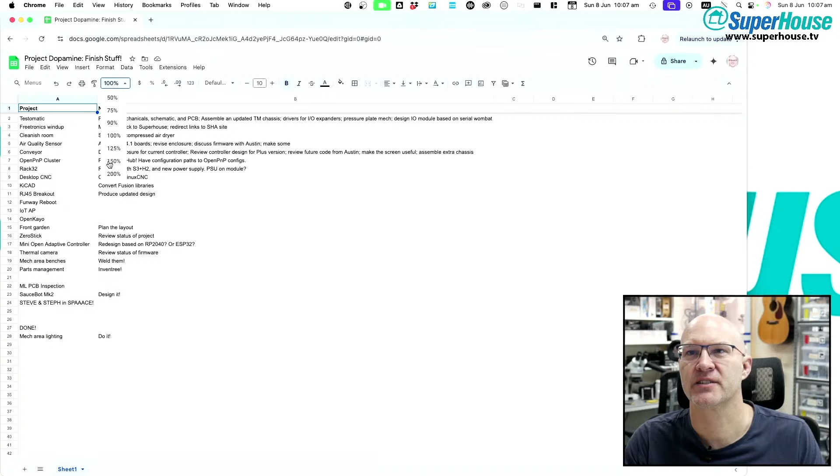Maybe even more. Let's go 200%. 200. So, yeah, Mech area lighting, done, do it, done.

ML PCB inspection, this is all future stuff. SauceBot Mark II, Steve and Steph in space. Inventory, Mech area benches, well done. I've already done, okay, I've done one. I need to do another one. Thermal camera, MOAC, Zero Stick, Front Garden, OpenKayo.

Oh, OpenKayo is, I had this code open a couple of nights ago. Add incoming and whoop,

Outgoing. Ooh, good today, Johnny. 32 months. Thank you, Johnny, my hot Swedish friend coming through again.

Incoming, outgoing messages via CAN bus. That is something that needs to be done to the firmware. Yes, I know, I'm reading this list backwards. I don't know why, it just happens this way. IoT AP, I don't know.

Do I... this feels like... Alright, this feels like a project that needs to be moved to the bottom of the list, because even though it's something that I really like, it's a fun thing to work on - oops, why didn't that drag - it's a fun thing to work on. I don't have a burning need for it right now, and the scope of it is just a little bit too much for me to make progress on other things.

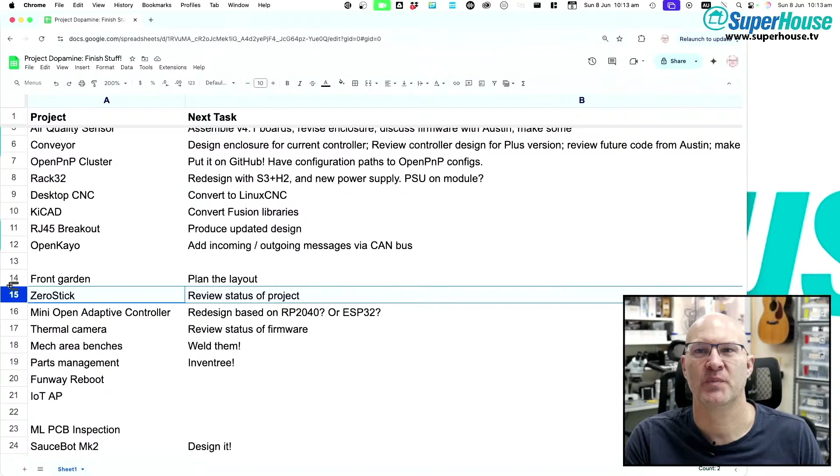The scope of it is small enough that it can be taken through to completion, and it could be a very beneficial thing for many people. So I really want to work on that. But do I move that above the line at the expense of other things?

Now, KiCad, I'm going to move that down below the line because, yeah, just because. Okay, OpenPNP cluster, I'm going to move that below the line, even though it is pretty much done, because what I need to do is be able to clear my mind to the point where I know there are things on the list below the line, but I don't need to think about them because I don't have room in my mind for them. I will just end up jumping around all over the place and not get to any of them.

So there are important things that need to be up here, and Conveyor is very high. It's actually super high right now.

Desktop CNC, okay, this is another good one. So I have my 6040 CNC machine, which is currently sitting on a trolley just outside in the loading dock area, and I want to convert that over to running Linux CNC. But I don't actually have a project that needs CNC right now, apart from a certain big project. Oh yeah, that's right, the truck curtain project. I can talk about that now. That needs CNC, but the CNC for that is being done by my friend Plasma Steve, and he is the CNC expert. He's got all the big machines, which means that if I do need something CNC'd, I have that option at his factory just down the road. So the need for doing that is actually pretty low, so I'm going to shove that down the list.

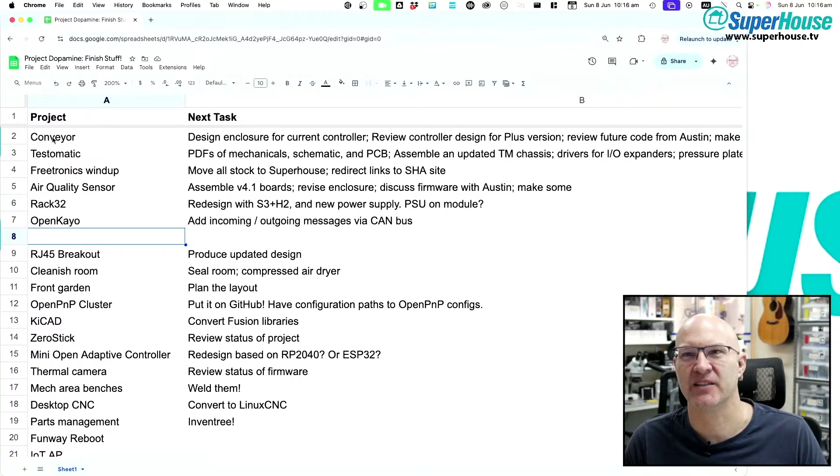So, okay, criteria, what are the criteria? I should actually have criteria. What are the criteria for things getting up into the hot zone up here where I'm going to work on them? I think the criteria, very roughly speaking, should be: there is a need for them, and the scope is small enough that I can realistically take it to completion. What else? I suppose that's the two things, isn't it? Or that they are close enough to completion that the final step, this kind of comes into the second point as well, is small enough that I can do it just to get it off the list entirely.

Now, I think the air quality sensor falls into that category, which is why it's still there. There is no burning need for the air quality sensor project.

Some Call It Fun said, do you prioritize based on what only you can do versus what could be delegated, for example, workbenches? That is a good question. So what I can do versus what can be delegated.

Yeah, welding the benches is not something that I'd thought of as being delegatable. It is, of course - I could get someone else to weld them. But I want to do it myself, because it's a fun thing, and because it is radically different to the stuff that I normally do day to day. It's more practice for me. Becoming better at welding is just something that I want to do. So I am absolutely certain that if I called Steve and said, Steve, any chance you could come over for like an hour and weld up the frame for those workbenches?

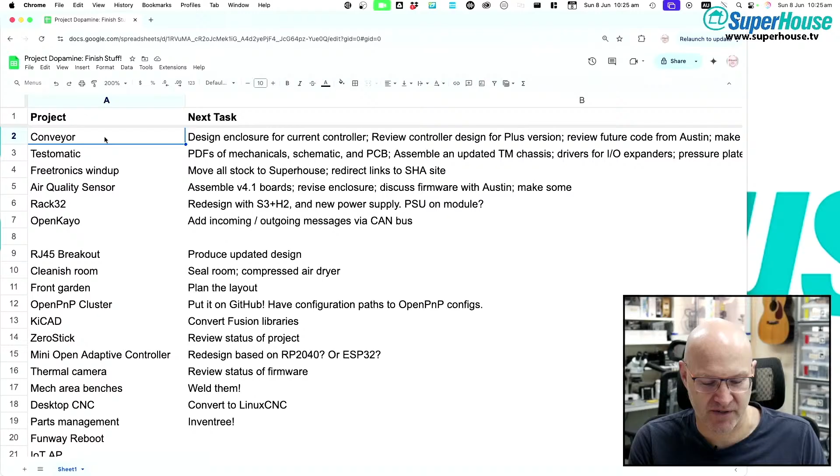And the way I saw it described on this post or whatever it was, it just put it very well. It's an experience, a feeling I've had for my whole life, this feeling that I've got to be doing something, but I'd never really articulated it or seen it explained in a very clear way before.

Alistair says some ND brains need a fast idle to keep working. Yeah.

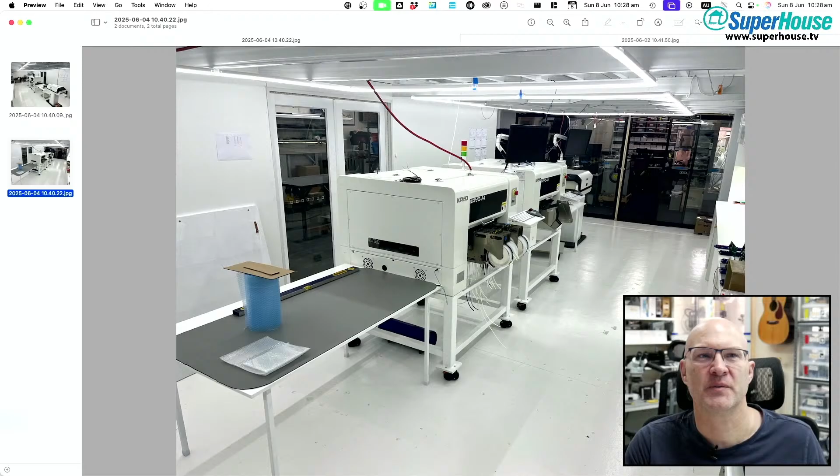And so what we've also done is move them a little bit closer to this back wall, to open up the aisle here, the main aisle. So instead of having two narrow working aisles, we've now got a very narrow service aisle down the back and a wider working aisle at the front.

Pete said, as someone else pointed out earlier, you need a new live stream thumbnail made. Yeah, I do.

So, old, new. And if we switch over to that, and that, so that's old with the back of the machines there, and that's new with the front of the machines. Don't know if you can tell. You can kind of tell.

So the size of the aisle here, this is the old arrangement, was a little narrow, and now it's a little bit wider, not a lot, it's like 200, 300 mil wider. And I think I'm actually going to move these machines a little bit more towards the wall to make this back service aisle even tighter, reduce that space a bit more.

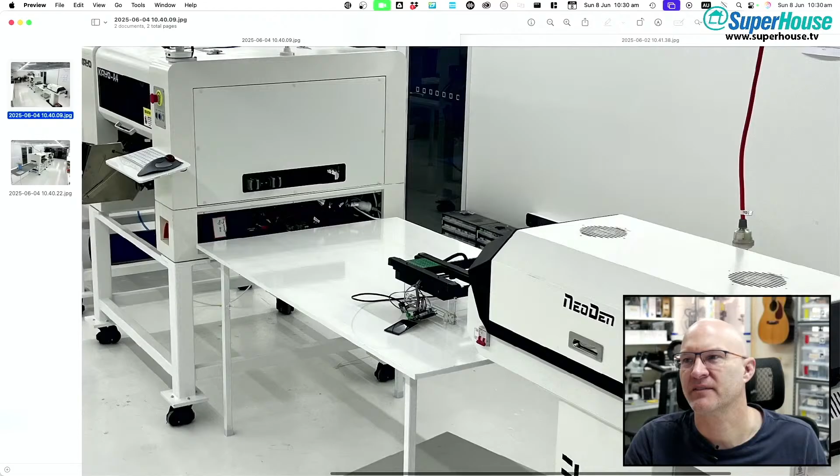So now the boards start from the far end, come through, come out here. This is the area I've been working on the conveyors, just in here, right there. In fact, you can see the conveyor prototype sitting there on a laser cut frame, and then into the oven, and then the output side of the oven, if my stupid face wasn't in the way, would be there.

Let's get rid of me. So the output side of the oven is here, and the boards come out and into this tray on the right hand side.

So when you're standing in the front office looking at the glass wall, what you're looking at now is the output side of the oven, not the input side of the first machine. How long until John walks right past the oven end to collect a finished board at the far end of the room? I've already walked around the machines a couple of times the wrong way.

So yeah, anyway, that is the update on rearranging that, and it's been a success.

It's been very good. Okay, because I did not have a chance to fuel myself, I need to take a swig of the fine beverage now.

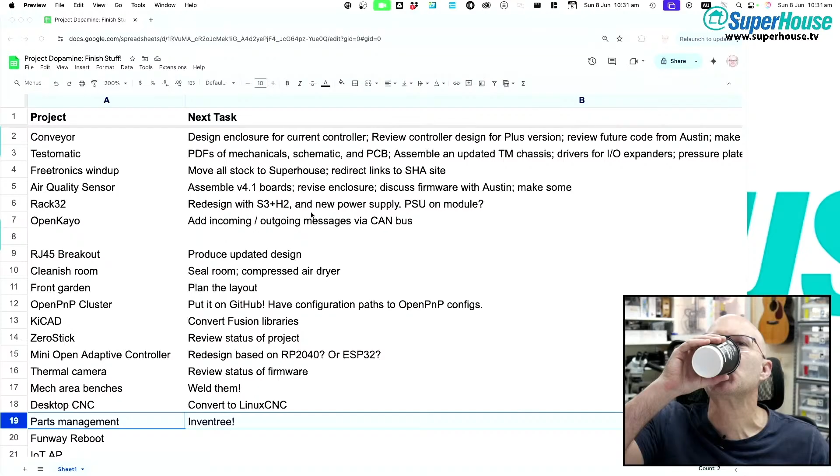Okay, that's a bit better. Yeah, okay, back to the chat.

Scott says he finished up a network job today that would have been a whole lot easier if he had his testers finished. Yeah, those testers, you are on a winner there, Scott. That is a really good project.

Sorry, I'm just seeing messages from Pete. I'm going to have to come back to these messages. Yeah, Scott, so your project... oh, I've got something else to show you as well in a moment, some 3D printed stuff related to the conveyor. I will get to actual things soon.

Stephen W said the AQS is 90% there. Yes, the air quality sensor, that's actually the reason I've left it on the list. All I need to do for this, there are multiple things. I still need to get Austin on the stream - I haven't seen him in the chat, but I apologize to Austin for not following up on this. I need to get Austin on the stream to talk about the firmware for the AQS. I need to do the enclosure revision, and then assemble some boards so people can buy them if they want to, and I'll probably sell about 3 of those. Totally not worthwhile, but oh well, it's still an interesting project.

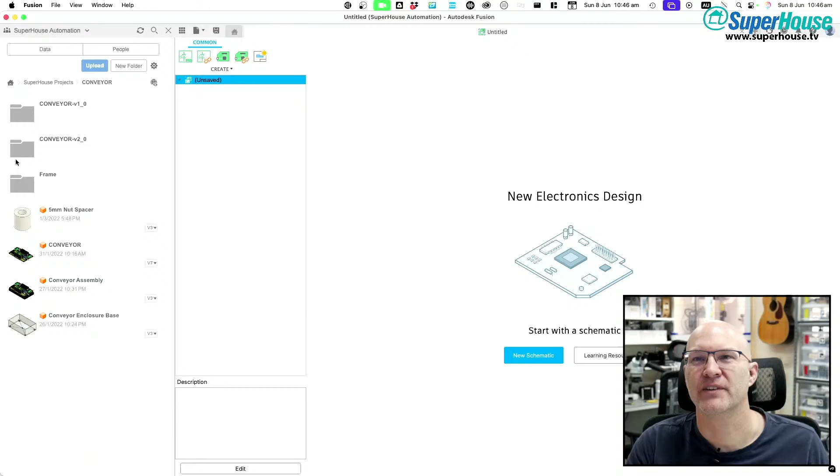Where are we, where are we? Oh, Fusion has opened. All right, so I will open Conveyor and bring this up here. Conveyor frame. All right, so this is what I was doing yesterday.

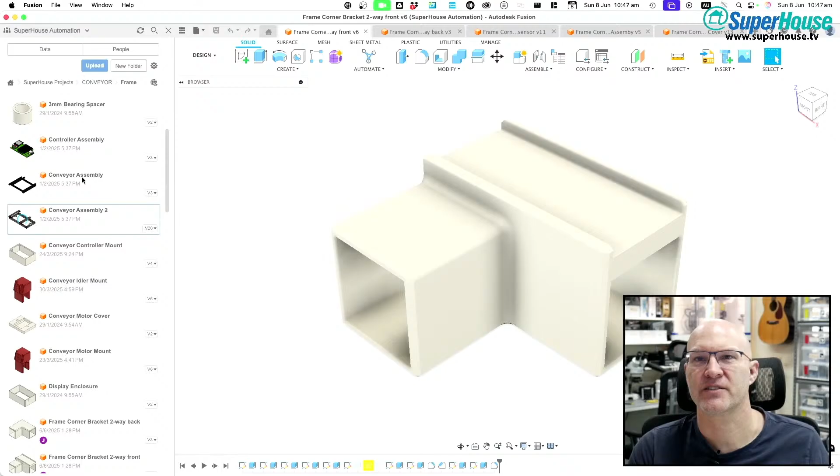I'm going to open a couple of things here, and so there's that, this front, there's this, I'll open that, and that, and get rid of this so that I can go through the different things. All right, now, do I have a mock-up of the frame assembly? Oh yeah, conveyor assembly 2. All right, this will be useful to explain what's going on, because you can see this quite clearly.

Now, looking at it from the front, this is what the conveyor looks like, and I made the different parts different colors so that you can see where 3D printing ends and aluminium begins and vice versa. Now those linear rails are not the full length, they actually run from there all the way back up to there so that the back rail can move all the way along, and that is no longer done that way. So this is quite an old assembly, I don't know when this was last edited, but it was a long time ago. But it still serves to illustrate approximately what's going on.

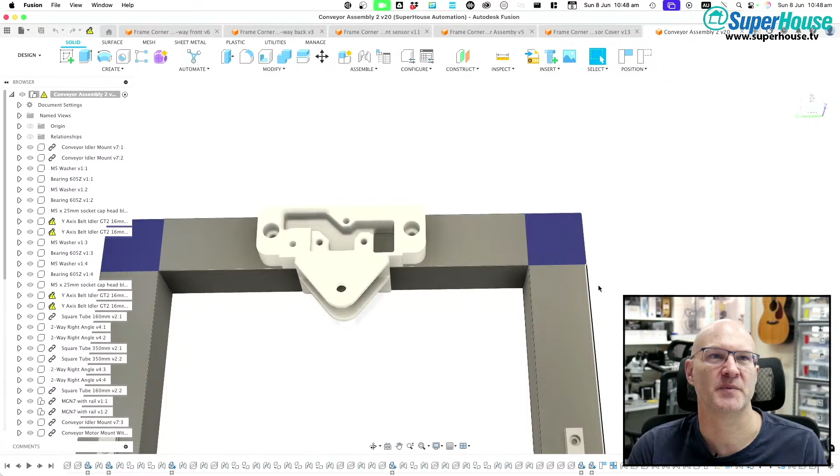I start with this fixed square chassis, and it has these corner pieces. This is made out of aluminium extrusion, it's 1 inch square extrusion. So 25.4 millimeter extrusion, or something like that, whatever a freedom unit is. And then there are plastic pieces that you hammer on, so you get corner pieces and then you hammer them together.

And that forms the bottom square frame. So that square frame at the bottom is a fixed rectangle, and then everything else attaches to it. Cables go through it, there are cables that go into the frame here, and then they pass around this corner all the way along the side, and then they come through this corner, and then they come up here into this mounting point. So this is the mount for the y-axis limit sensor for homing, and that's the clevis for mounting the idler pulley for the y-axis belt, etc. So anyway, you get the idea.

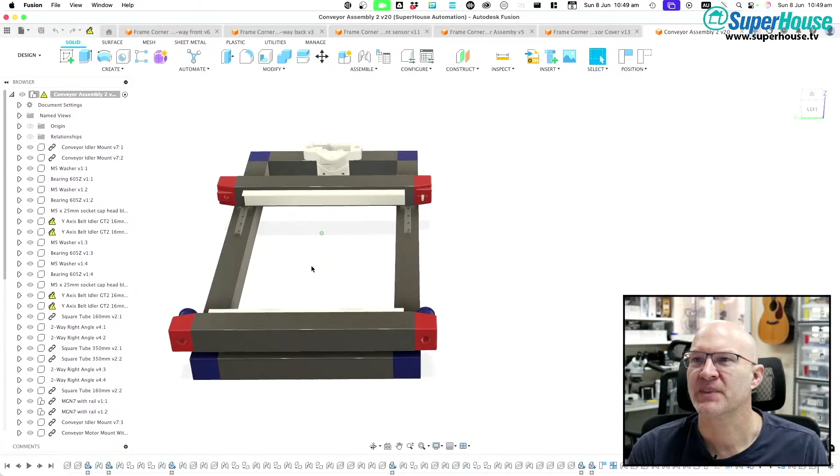This is pretty close to how the current conveyor works. If I went and grabbed the conveyor and you looked at it, you would see that this is what it is.

Now, there are a couple of minor issues. One is, yeah, the scale - some of these dimensions have changed slightly. This aluminium actually comes a little bit further out now, it doesn't finish inboard of the base frame, it now comes out just slightly past it. Or actually, I think it might end up flush with it. So the end of this bit of aluminium, this line right here, is now - I think it might be 350 millimeters, I can't remember - ends up flush with the outer face of this frame.

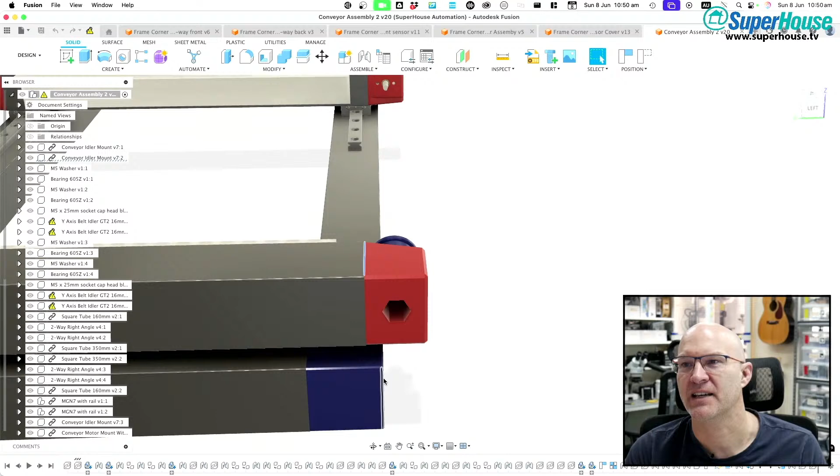That's dictated by the length of the GT2 timing belt that goes around it. So I'm in the situation now where I need to make more of these.

Oh, and also we now have the board sensors attached. There's a board sensor near the middle to detect the central position, a board sensor at the exit, and a board sensor at the entrance. They mount on little brackets that go into this cavity and protrude out so the sensor is looking straight up towards where the PCB would be.

All right, so that's the current state of play, approximately.

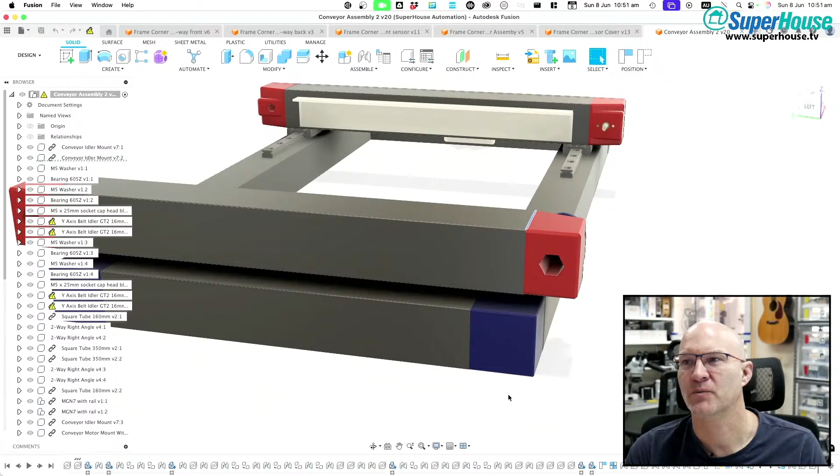I need to make more, and I wanted to try to make something that was more integrated, simpler and more repeatable for me to assemble. This current arrangement, you can't see it here, but there are spacer blocks that go in between, all sorts of small parts. There are lots of holes that have to be drilled in order to locate things properly, and the front and back rails have to be exactly parallel to each other.

So it's kind of fiddly to put it all together, and I've been thinking through how to make a design that is more self-aligning, where the pieces are more integrated. I'll show you what I've been doing over the last couple of days.

Front, back. Yeah, so this is a replacement piece for this corner piece. I wonder where that corner piece is. Two-way right angle. What happens if I activate that? Oh yeah, there we go. Now you can see it.

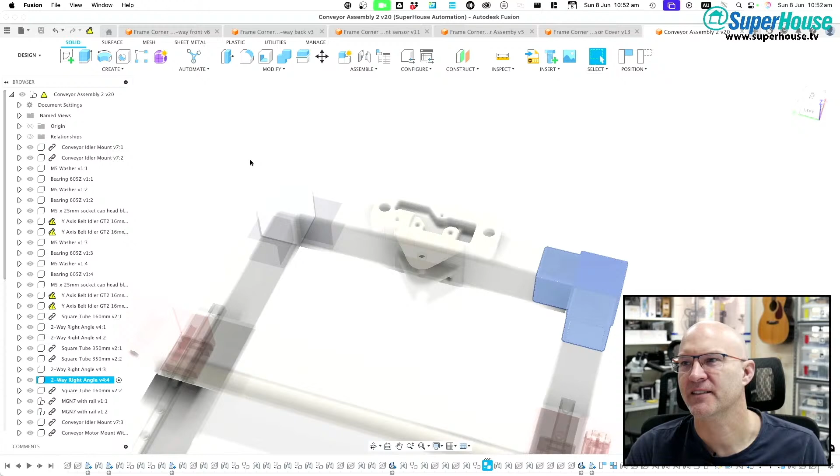So that corner piece is a cube with two bits that stick off, and those bits that stick off you hammer inside the extrusion. It actually deflects the extrusion slightly because it's a very tight fit. When you hammer this in, this top part of the extrusion ends up, like it starts flat, it's a very flat square extrusion, and then it starts to bow up a little bit in the middle because of the pressure. So this top face ends up with a very slight upward bow, and this face ends up with a very slight outward bow.

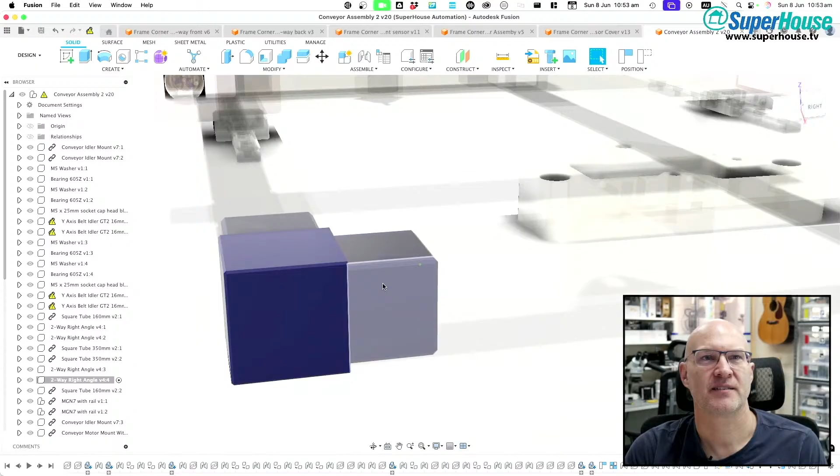So the act of hammering this together is definitely a one-way thing. You cannot get this apart again afterwards without destroying it. So it's a one-way assembly process. You buy these plastic pieces, cut the extrusion to the length you want, hammer it together, and it's there forever.

So I wanted to improve that slightly. Instead of buying these pieces, the advantage of this is that you end up with a flush face. The cube here that is the join has its face flush with the bottom face of the extrusion. And in a lot of situations, that's exactly what you want.

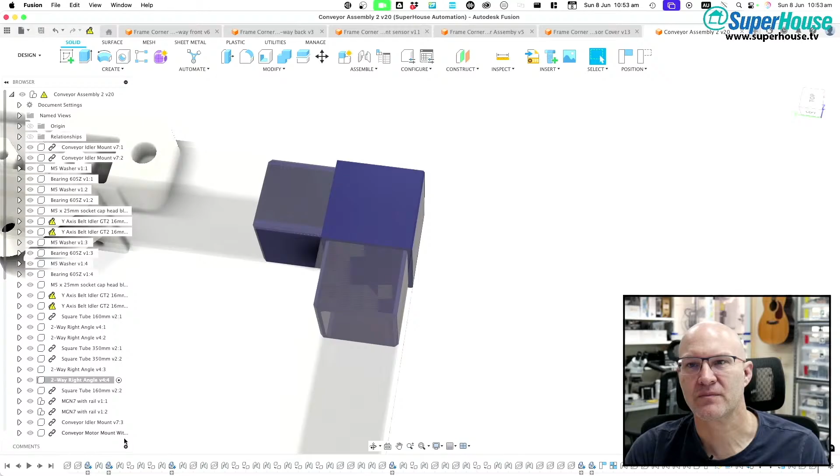If you want to make a frame, I'm going to deactivate that now. Can I deactivate from here? Pin. Release with change order. Nope, no, I don't want to deactivate. Okay, I'm just going to activate that instead.

All right, so yeah, you can see there that you get nice flush finishes, and a lot of the time that is definitely what you want.

But in my particular case, I don't really care about that. So what I've done is designed my own version of that corner coupling, but it fits on the outside of the extrusion instead of the inside. So the extrusion you cut to length and then push inside this coupling, with the result that the outside face of the extrusion is on this level. That means the corner coupling is actually a little bit thicker than the extrusion, protruding past it by a couple of millimeters. For me, that's fine, that's no problem at all.

And it means that by tuning this... Your face is flush. Ah, thanks, Pete. Not as flush as your face. So you say such nice things.

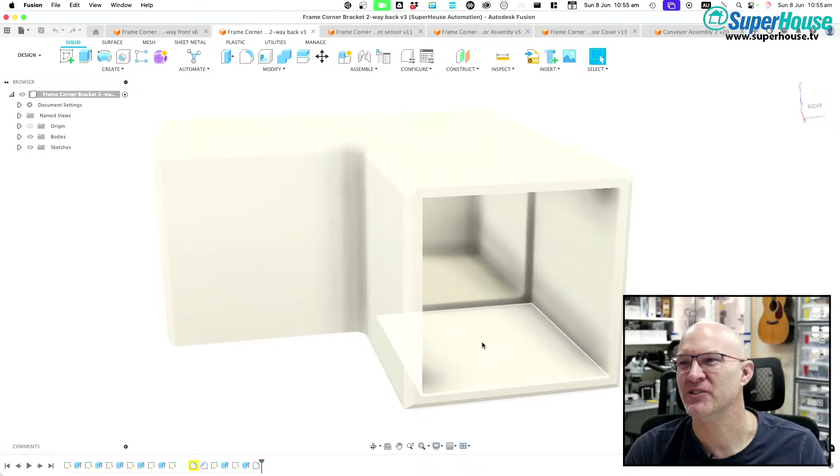By tuning the spacing on this, like the distance between these faces, it's possible to tune how tight that fit is.

Hang on, I'm going to go and grab some stuff because I printed it. I will show you what's going on. Overhead camera? Yes. You didn't quote it. I didn't quote what? Oh, he didn't quote it. No.

He didn't quote it. So these are the couplings that I've been designing. This is the simple one, it will become progressively more complicated. This is the simplest case, a right angle coupling for two pieces. So if we've got this, it's just a short offcut of the extrusion that I was using for measuring. If we have a length of this, it's a moderately tight fit, but if I get the angle right, I should be able to do it.

Nope, I need to clean that one out more. One of these I had cleaned up because it needs to be printed with supports. There we go, so it slides inside, and it took a bit of force. I have no problem that is going to hold still.

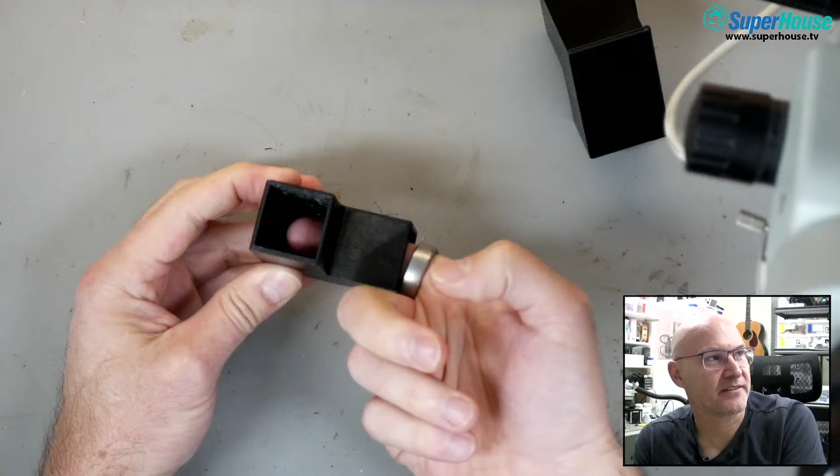Now, that is a back corner, so that could be like a back left corner or a back right corner. And I've made it so that the cable can pass through the middle. You can see in there that it's just a tube, so I can run internal cabling between the two parts of the frame.

Now, the next step is, so if that's the back right, that's the back left, I'll arrange them here. This is front right, that is front left. Now, what I did with the front ones is I integrated, because previously I had a spacer block in between the front rail and the front part of the frame. So the front rail would be elevated, and it has to be elevated because we need to allow for the thickness of the linear rail that supports the back part of the back cross piece.

So what I did was I integrated the spacer, and you can see what will happen in this case. Cable tie said, heat, cool and expand, contract cycles might see it working its way out over time. Oh, that's a good point, Pete. Yeah, maybe I should put a screw or something in it.

So I need a second piece of extrusion so I can demonstrate it. Do I have one handy? I'm going to have a quick look. I had a pile of miscellaneous bits of extrusion around here somewhere. Oh, down there on the floor. Okay, I'm going to have to go digging. Oh, here's a short piece, this will do nicely, it will serve to illustrate. Oh, and here's another piece with some fittings in it. Also very useful as a prop.

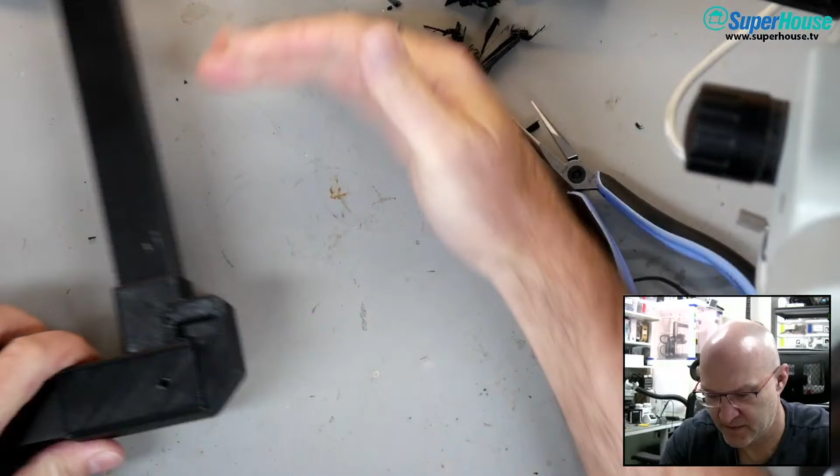Like that. And then the top rail sits in here, and the PCB sensor goes there with a little cable channel that goes down through it. So the whole corner is one integrated piece that incorporates the PCB sensor and all of the mechanicals for attaching the frame and the top rail as one unit.

Now, what does that look like? It looks... 3D printing seems to be a good source of plastic swarf. Yeah, it does.

Oh, John says you need to test it for him. Yeah.

Yeah, Grant says, oh, Shavuot, June 1st to 3rd. Yeah, I think that was it. It was whatever it was a week ago, essentially. No, I do not want to update. Every single live stream I get this update. It times it for Sunday morning.

Frame corner with front sensor. Okay, so this is that piece that we were just looking at. It's a lot easier to understand what's going on when it's grey though, rather than when it's black. So you can see that there is a mounting location here for the time of flight sensor PCB.

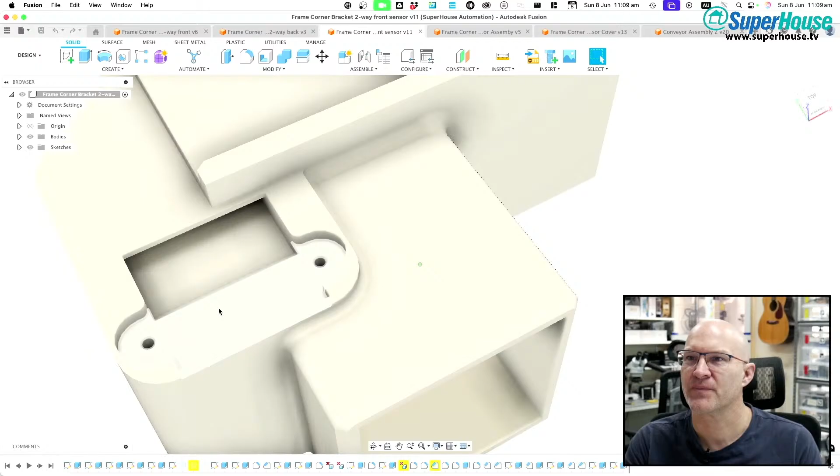Pete said, nice use of the specific machine for specific task. What settings are you using? Does it smell like cheese?

Same part, says Paul. Yes.

So let's take a trip through here. We can fly through.

Hey, what's that game from a few years ago where you were flying a spaceship? Does Pete smell like cheese? Descent, that's right. How many people here, yeah, does Pete smell like cheese? I don't know.

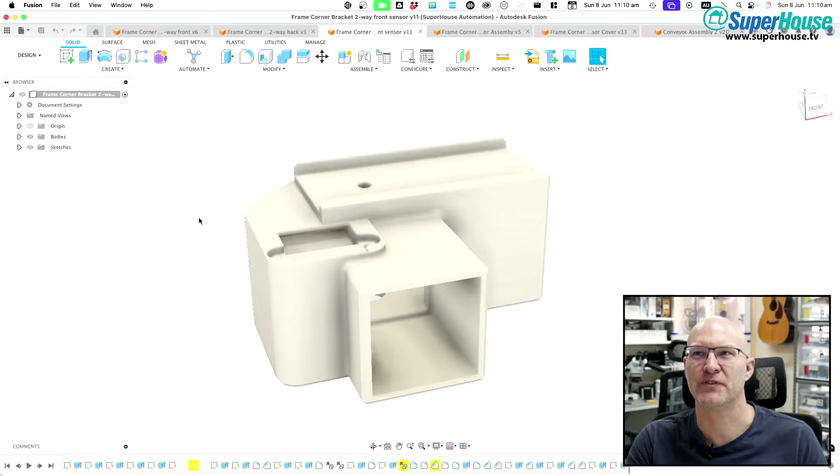How many people here remember the game Descent? I remember loving that game when it came out, no, not when it came out, it was sometime after it came out. I ended up getting it. And yeah, it was one of the few visually really impressive games that would run on Mac, because I didn't have a Windows machine, so I couldn't run most games.

But Descent ran on Mac, and it just looked incredible. It was a 3D shooter where you are flying through enclosed spaces that are essentially like a maze and being attacked and having to destroy things. David says, epic game, 6DOF movements. Scott says, Descent was very dangerous if you were prone to vertigo. Yep.

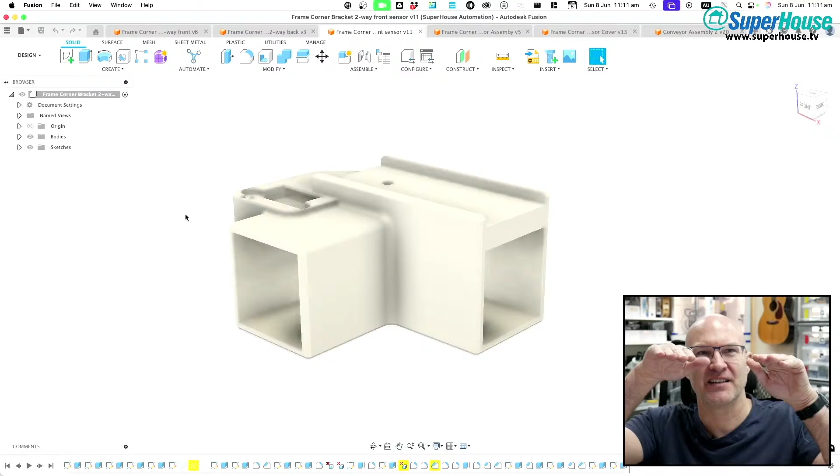It's years since I've even thought about Descent. Now I want to play it. So you're flying a ship through spaces that could twist and rotate, so you had no sense of up and down. You would end up going up into a passage and be flying vertically. But now is it vertical? Are you flying horizontal? Does it matter? If you barrel roll, so you're totally upside down, it just gave you a different perspective on things. So coming through this just reminds me of Descent.

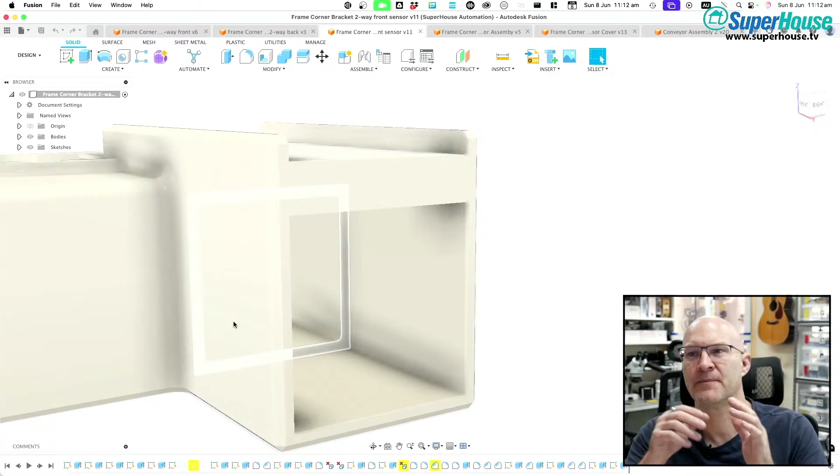So this is the shape. We have 2 bits of extrusion, three, one that goes into here and one that goes into here. And you can see I've put backstops in it, so the extrusion slides in and hits the backstop and only goes to that point. So if the extrusions are cut to the correct length and then you put them into the couplings and bed everything down, it'll end up with the correct dimensions.

So we have 2 bits of extrusion that go in. Then the 3rd bit of extrusion, which is the front rail, sits on top.

And you can see there's a small hole there through the body, and there is a big hole in the bottom that is aligned with it. The reason for that is to bolt the top rail on with a blind screw or a blind bolt.

So the idea is there will be the extrusion sitting on top of this with a hole in the bottom of the extrusion, and the end of the extrusion will be just around here somewhere. So it's only like a small distance in from the end.

So what I can then do is get something like, and this is a 3.4mm hole here, and this is, I think, a 10mm hole here. So what I can do is use something like an 8mm M3 bolt and pass it up through here.

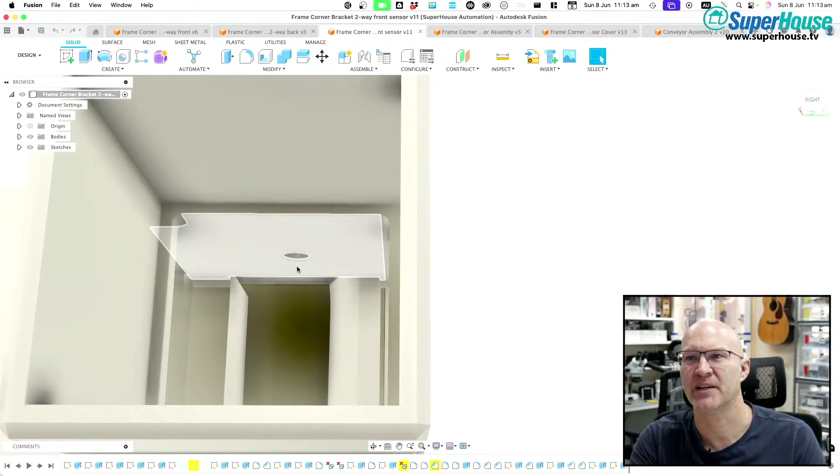So the head will pass through this hole, and the head will end up under here with a hex driver going up through the hole. And then on the top side, you reach into the extrusion with the nut, and the nut goes on the inside of the extrusion. So the end result of all of that is that it will be totally concealed fastening.

Hang on, I've got a cough.

So totally concealed fastening, a bolt going up from the bottom from inside this printed part to a nut that is inside the extrusion. So when you're looking at the top rail, there will be no holes, no breaks or anything like that. It'll just be smooth, so it should look quite nice. So that will fix the top rail in place.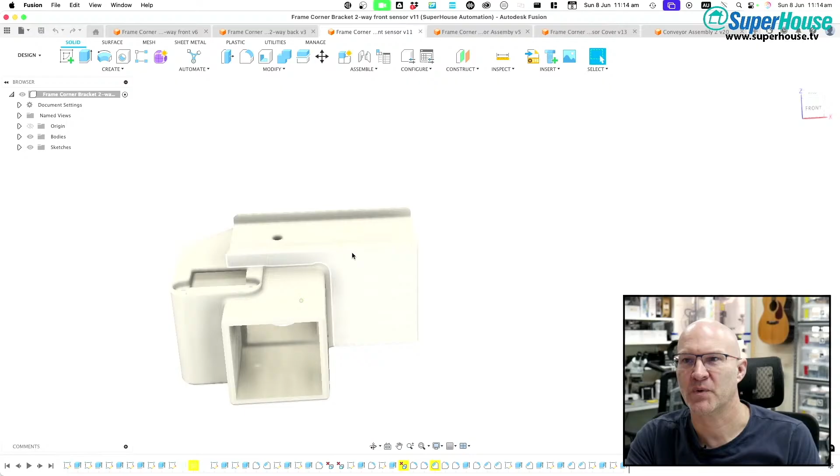Then the time of flight sensor PCB sits into this weird cavity, and I'll show you that in a second. And then the IDC cable that goes off from one edge of it goes down through this slot. Let's do our descent trip here. It goes in through this slot,

And then we're now inside. Oop, we've lost all perspective. It comes in, whoop, through. This is the other side of that slot.

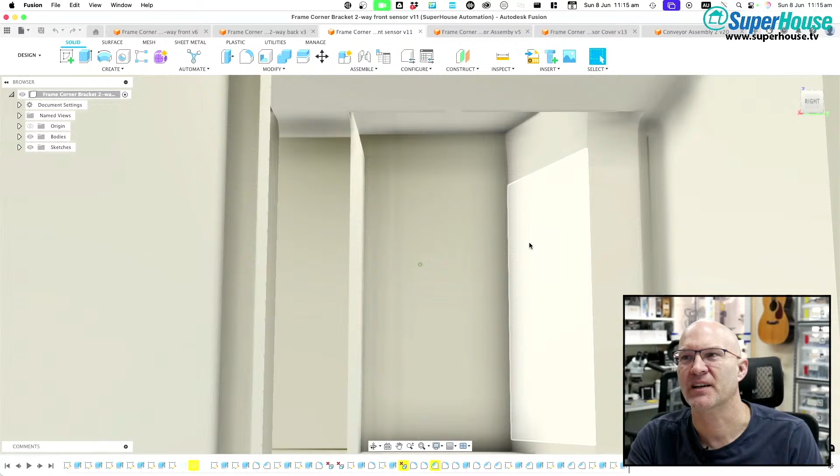Comes in there and then folds down, and I put an angle on this wall, partly so that when you push the IDC cable in, it'll hit this face and then be deflected sideways so that it will come out through here.

And then the IDC cable runs through the inside of that extrusion, which is the front part of the frame, and then out of a hole of that extrusion into the controller. And the controller uses that to connect to the time of flight sensor.

So the assembly here, oh, and the other thing, so this piece then sits on top of the time of flight sensor, and that is going to make sense in a minute. So this is an assembly, and you can see that there is this top piece.

I'm going to turn off the cover. So you can see the time of flight sensor PCB just sits in that location. Cable soldered to it goes down through that hole, and then this cover goes on top, and then it's got two countersunk screws that go down into it, and the extrusion sits over the top of that tab.

So hopefully that will end up being a very neat structure on the corner with everything integrated, mechanical and sensor, and everything all inside this one thing.

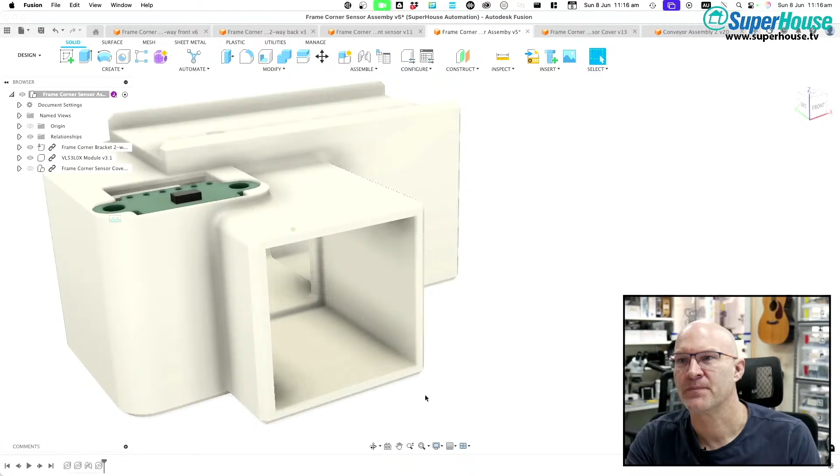So, sorry, I'm pausing because I'm just hearing a car very slowly going past out the front.

Yeah, that's the current plan. I haven't printed any of the top cover yet. So that is the top cover. And you can see that it has a little recess.

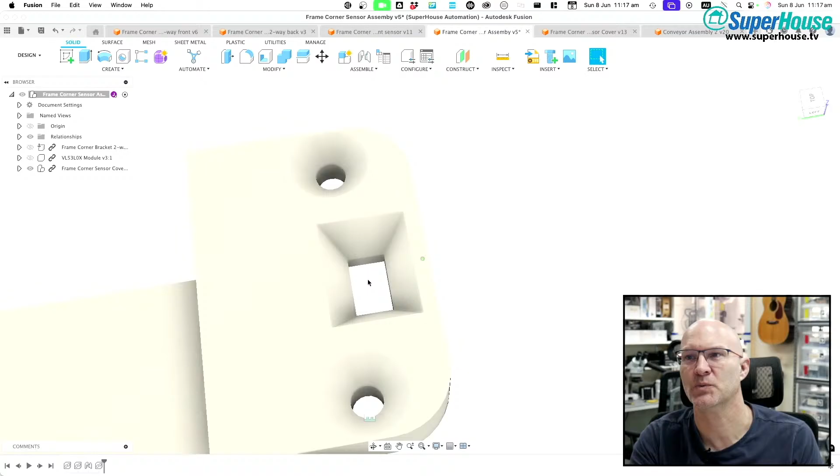Call It Fun said, does time of flight sensor work through plexiglass? Could cover just be solid to prevent debris from falling in? That's an interesting idea. Yeah, it probably does. I don't know what wavelength the laser works at, but I'm pretty sure it would.

I'm not sure if the time of flight sensor would be attenuated by plexiglass or something. So yeah, that could be a clear cover potentially. Well, something to experiment with.

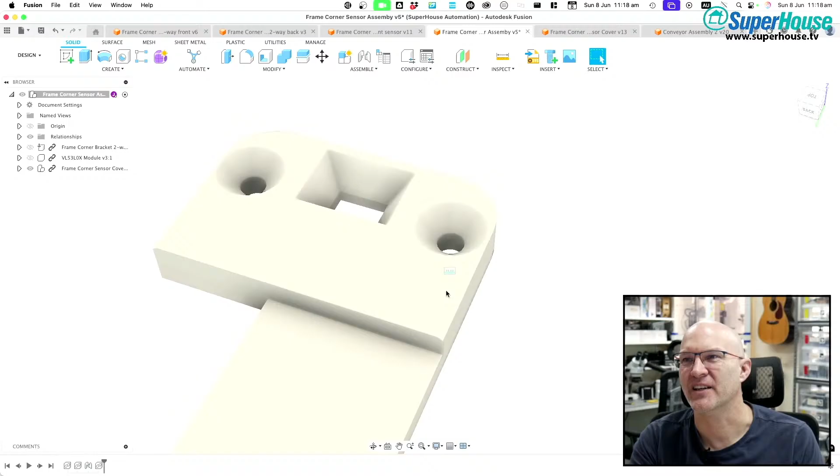I also thought about doing these screws from the bottom. Oh, Tinker is sending me some pictures, which might be for showing on the stream. Yeah, so at the moment, 2 countersunk screws to hold that in.

So if I turn these back on, this does kind of annoy me that there will be 2 screw heads visible here. But I keep telling myself that that's just me being OCD.

Because what I could do is make the top of this flush, have holes in this, and then have a hole from the bottom that passes all the way up. Have a large hole that goes up, say 2/3 of the distance, and then get smaller, so that a short screw could be put up through that hole, with a Phillips head screwdriver or a hex head, and then the end of that thread would go into the cover. So I would need little holes in the cover that don't quite come through to the top, and then it could be screwed in from the bottom and held down.

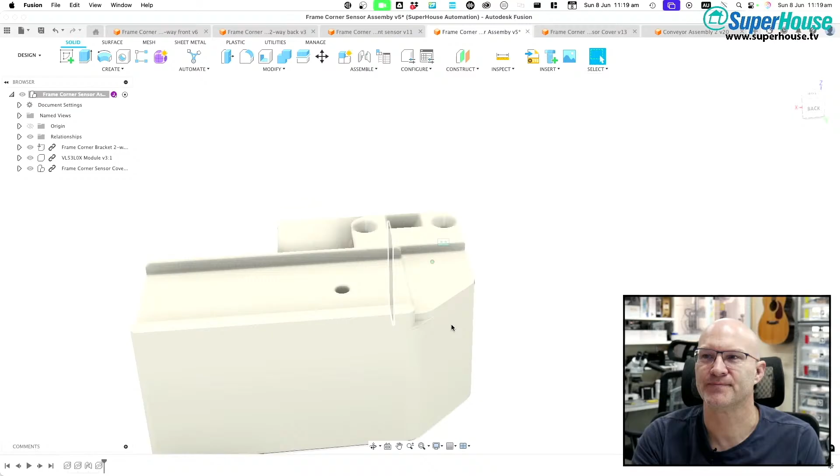But that all just complicated things, so I figured this is functional, it works. I'll use black countersunk screws, which I have plenty of, and this is going to be black plastic anyway, so it's kind of going to disappear. I need to stop being so obsessed with the aesthetics of it. Anyway, that was my little exercise yesterday afternoon, doing this front corner piece of the frame.

And that one that I just showed, ooh, Wagon Load says, lid slides on with a dovetail joint. Ooh.

Jordan says, integrate clips. And Paul said, do you want to notch the edge of the cover to match the rail?

I thought about making this more complicated, because what I could do is bring up, if I get rid of that and that again, what I could do is bring this in a little further and put a ridge along there.

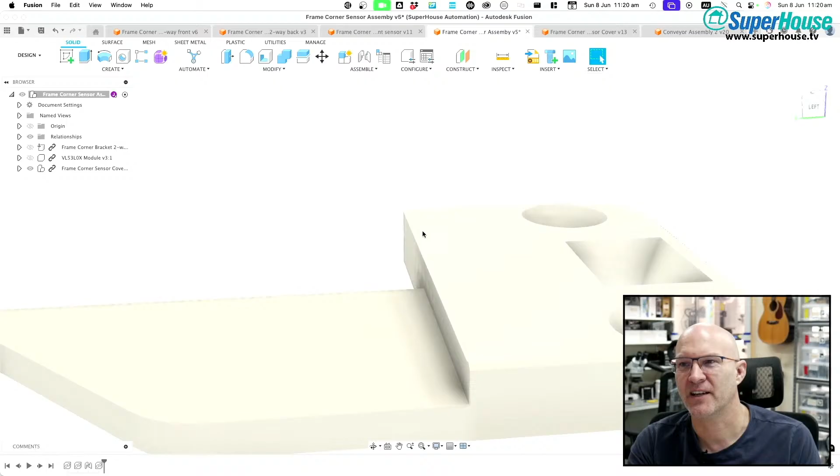Pete said, what's the long-term goal for this? Are you aiming to build a sentient garden gnome? Yes, I am planning to build a sentient garden gnome.

Yeah, so this part, and remove that little notch there, and properties - no, that's properties of the material. Yeah, get rid of that. Make that a vertical end so that when this slides into place, it aligns with that profile.

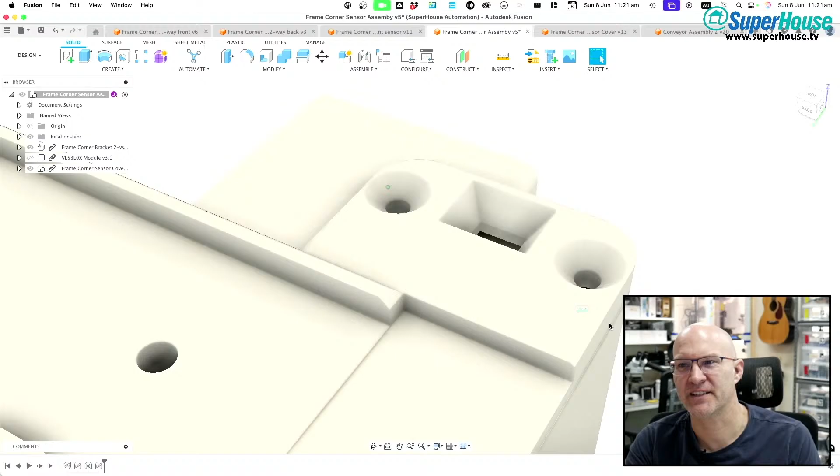So include some of that profile on this cover. I could do that. Now, the other thing, of course, is that this could just continue all the way across, and then this cover could end right there. That would be the other way of doing it. Make that cover much simpler, so it wouldn't have this tab sticking out at all. It would just be a rectangle with two rounded corners, and this part would actually be fixed.

It would be part of the main body. So I think that it would probably... Scott Miller said, just extend the profile. Yeah, that's right. So extend this profile. Imagine that was not there. This face here, extend it straight this way.

Now where is that? Oh, I know why I can't edit that - it's because we're in the assembly right now. So if we're in here, what was that? Edit feature. That was a 1mm chamfer.

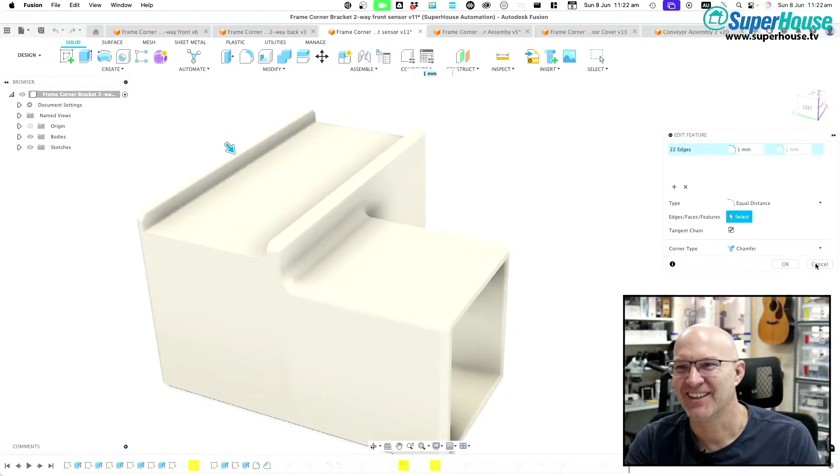Let's have a go at this right now, I feel like doing something constructive. All right, 1mm chamfer - where is it in the timeline? Is that the chamfer? Edit feature. No. 1mm. Yes, 22 edges.

All right, so that is those edges. Why are there 22? Why are there 22 edges?

Okay, if I suppress that feature - suppress that, no, that's the wrong one. I want to unsuppress it. Why isn't it showing it in the timeline?

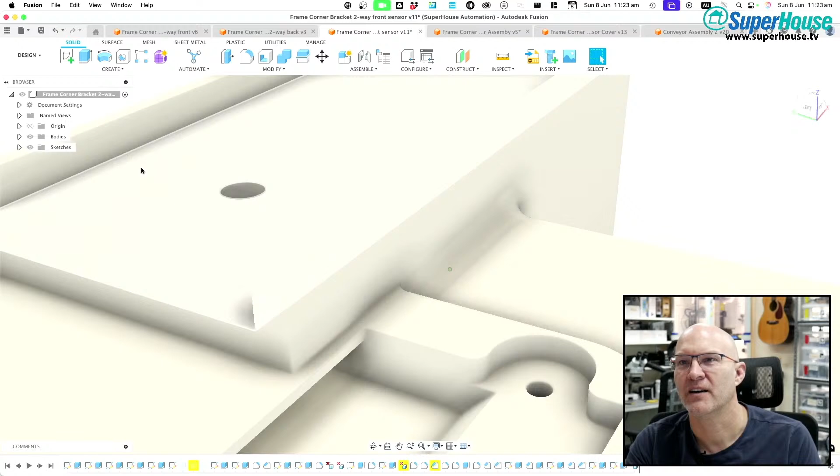I want to find that. Oh, there it is. Okay. Oh, it's all those edges. Do I want to... okay, let's see if I can just delete that without... I can. Nice. Okay.

Oh, that is a... yeah, because that's rounded around. Let's get rid of that and that. And maybe, can I get rid of that? Yes, that works. Okay, cool.

I can do this. What we can do is go extrude and distance to object, and bring it to here. And 3D CAD is a reliable source of brain damage. It is a reliable source of brain damage.

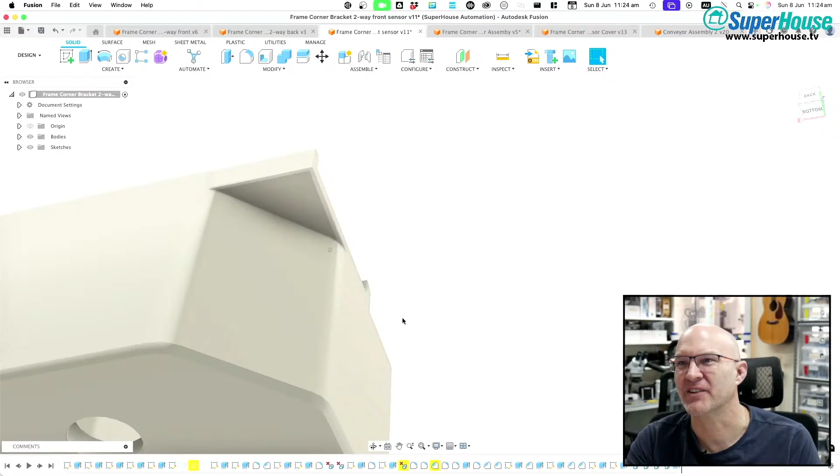And then do OK. Then I want to get rid of that overhang. Not that it matters - I mean, that overhang could actually stay, except that it's going to be annoying from a printing point of view.

So what I could do now is extrude all in that direction, cut, okay. So now we have a nice end. Yeah, that's kind of cool.

Oh, before I save this, I just realized, no - I just realized why I did it the other way. Hang on, I'm gonna cough again.

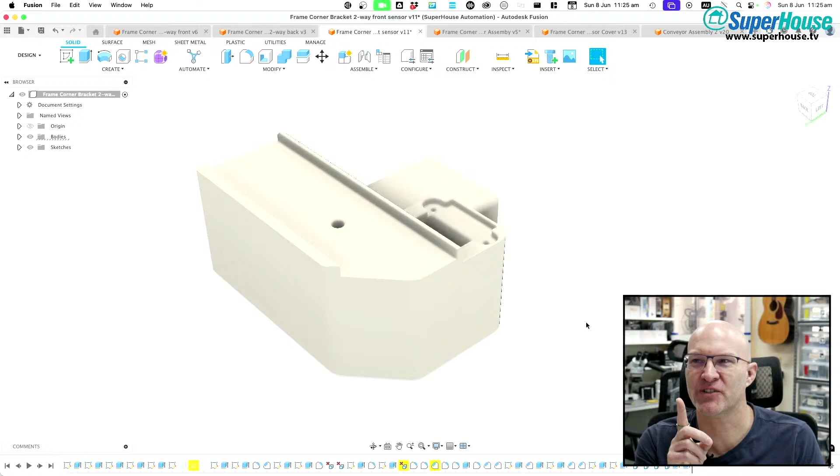Okay. I wish I could do it like this, but I can't. And the reason I can't is I need to be able to slide.

Now, where's the assembly? Yes, you remember this piece right here? That needs to fit on. Now, can I make that work? Maybe I still could. Where is it? This one. Yeah, that one needs to slide on. And I think I need to remove that part of the extrusion back to about here. How far does it come off?

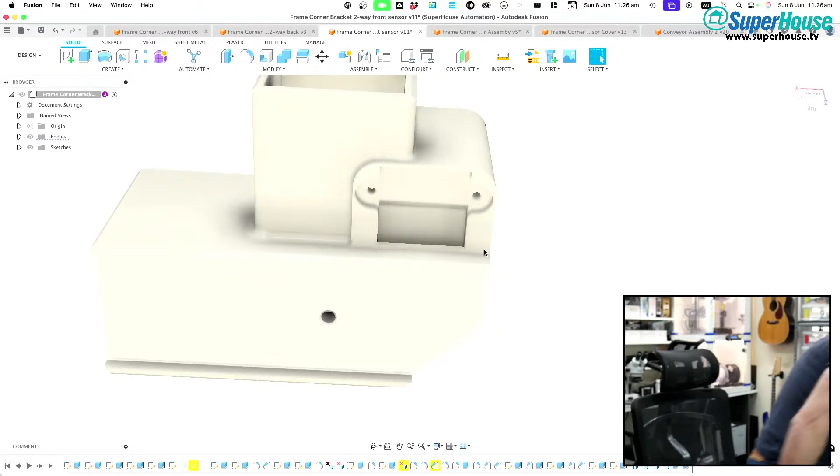All right, I'm going to go and grab the other bit of conveyor, the other prototype, because I don't have the full thing as an assembly, and I need to see what's going on.

Well, maybe it would work. No, it is going to work. It is going to work as is. I will show you why.

And the thing is that I could actually change the dimensions slightly on the horizontal rails. I'm going to have to move a whole bunch of things around here. This might be slightly out of focus.

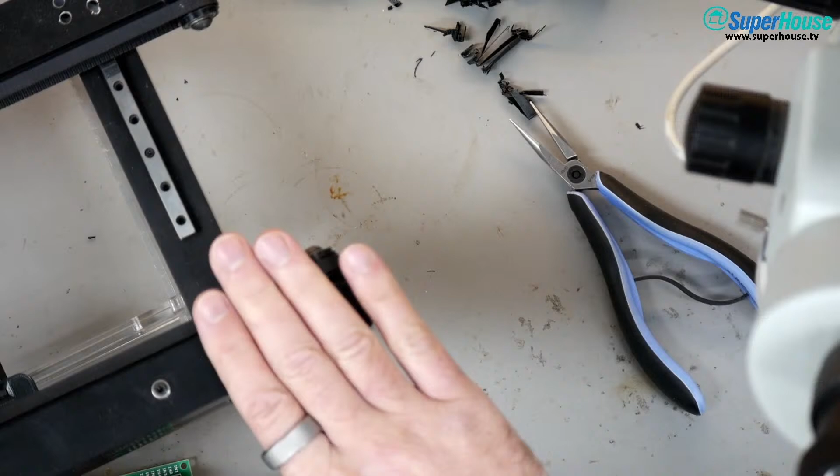So this is the corner we're talking about. This is the front right corner. And what you can see here is the PCB sensor. If I angle that a bit, you'll get a better view. So that's the time of flight sensor.

Save as with a slightly increased rev number. Yeah, I see what you mean.

Okay, so this distance here, if I grab myself one of my handy dandy little measuring devices, from this face of the extrusion, the sensor is extending 18 millimeters past it, and that is flush with the end of this extrusion. So this extrusion comes 18 millimeters right there past that face, and then this has to clip into it. So this piece here goes into the end, and that needs to clear whatever else is going on under there, which is where our new little thingamajig is going.

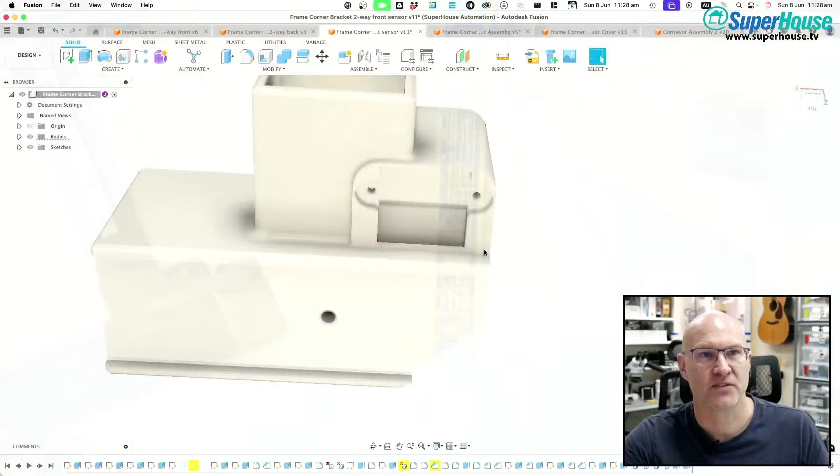But that actually works because the 18 millimeters, this face here, is the location of the face on the new piece of the structure. So if we come back to this view, the extrusion comes past here.

I wonder if I should square this off. No, I think I'll keep the angle because it looks cool. So this face here will end up approximately flush.

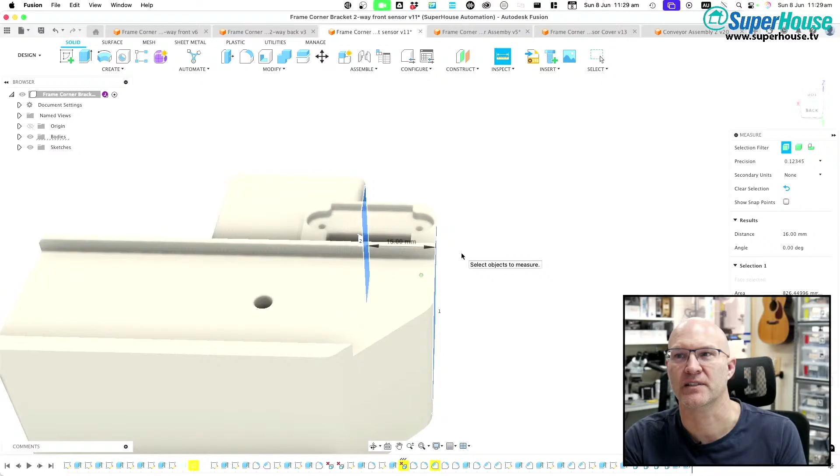In fact, I wonder if we can get a distance on that, even though they're offset. Can I do a distance from there to there? Yeah, 16 millimeters. And we've got 18 going to the end of the extrusion. So the extrusion is going to hang off the end of this by 2 millimeters, and then the cap will go into it. So that's perfect. That works really well.

Very, very cool. In fact, I wonder if... Scott Miller said, so it matches the end of the extrusion either way. Yeah, yeah. So that is fine.

That can stay like that. We can run this the whole way along. And then the cover that goes onto the time of flight sensor can be simpler.

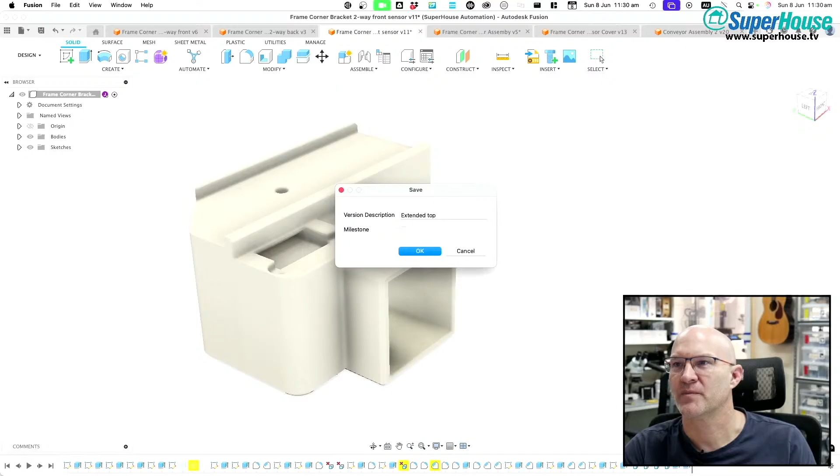All right, I am going to save this now. And I'm actually going to put a description in this version. I'm going to say extended top rail support, so that if I need to find it in my history in future, I can.

So now, if I go into not that one, where's the assembly? This one. And I update this assembly, this should now change. Yep. And then if I turn back on the time of flight sensor, it's sitting there.

And the problem now is going to be this, because it's got this tab that extends and I need to get rid of that tab. So back, front, sensor cover, this, I need to get rid of that tab.

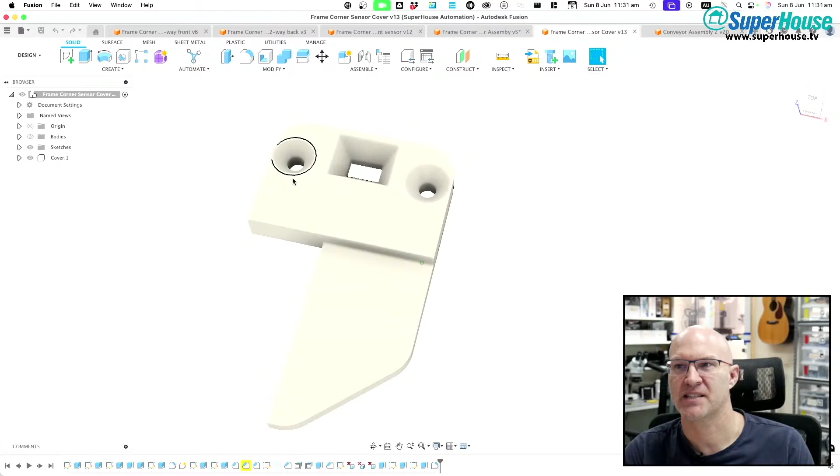Now this particular piece of the design is kind of butchered from the original sensor housing. So that's why the timeline down here is really complicated. It's got lots of extra stuff in it because it's got things like the full size of the original sensor housing. All I did was make a copy of the project. Scott Miller said, definitely making my case design look too simple.

So the simplest way for me to solve this, which is brutal but should be functional, is if I select that face and then extrude, extent to object, cut, go. There we go. That was a nasty way of doing it, but it does work.

All right, so now we have a piece, and I'm going to say removed tab under top rail. Okay.

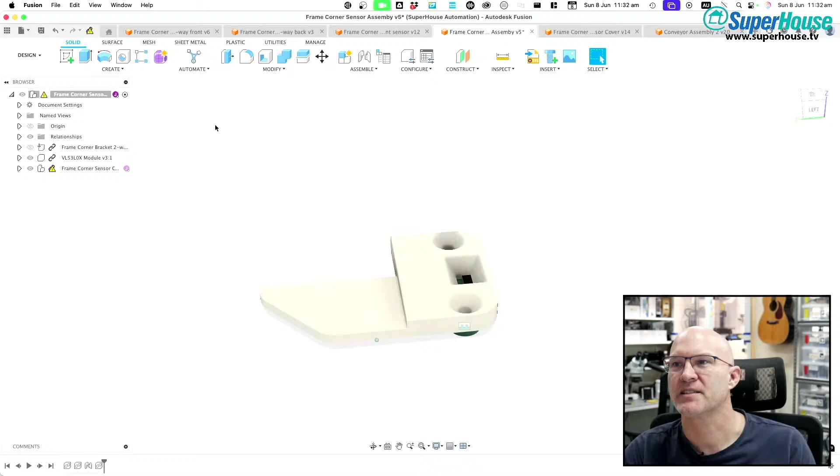So now if we come back to the assembly, we'll do an update here, pull in the components. So now we've got the time of flight sensor and its cover. And in fact, better still, what I'm going to do is come back to here and change appearance so that we can see where everything is.

We'll pick plastic. Oh, you can't quite see this, but oh well. Plastic, I'm going to make it not translucent, opaque. I'm going to make it glossy blue. There we go. Save that.

And then when I update this, we'll get the material color coming through. And then when I turn on this, we'll be able to see where it fits. Why is there an interference right there?

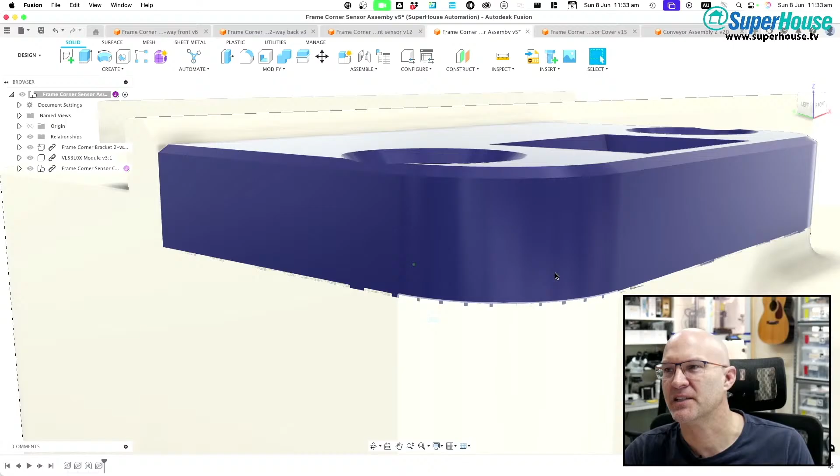Ah, that's just because of my... the two cable tie bodies.

It says that now also means you can access the TOF sensor without disassembling the whole joint. That is absolutely correct, because it means that there is no tab that is trapped underneath the top rail. So I think this is a good improvement. Thank you very much for the suggestions.

Once again showing, Wagon Load says, can you make Lego mounting pegs on the time of flight lid?

Yeah, so you just push it down onto it rather than using screws. Maybe.

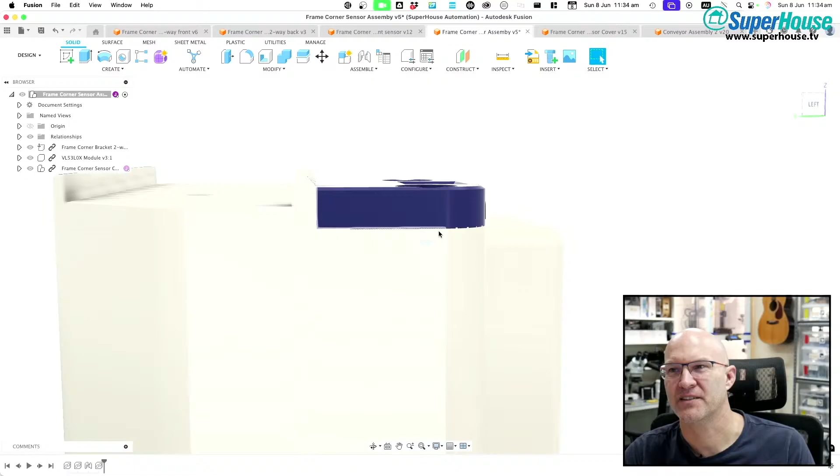Yeah, so I could have holes in the body, and the lid could just have little pegs that poke down into it. Like that sort of, is that the sort of thing that you had in mind?

Quite possibly, so that it's just a press fit, you push it down and it stays in place. That would be cool.

Yeah, well, my interpretation was not literally following Lego dimensions or making it Lego compatible, more taking the inspiration. Scott Miller said, wahahahaha, wagon loads. Yeah, more taking the inspiration from Lego that you can push things together and have them stay.

Yes, that's going to take a little bit of tuning. What the hell? Let's do it. Let's go.

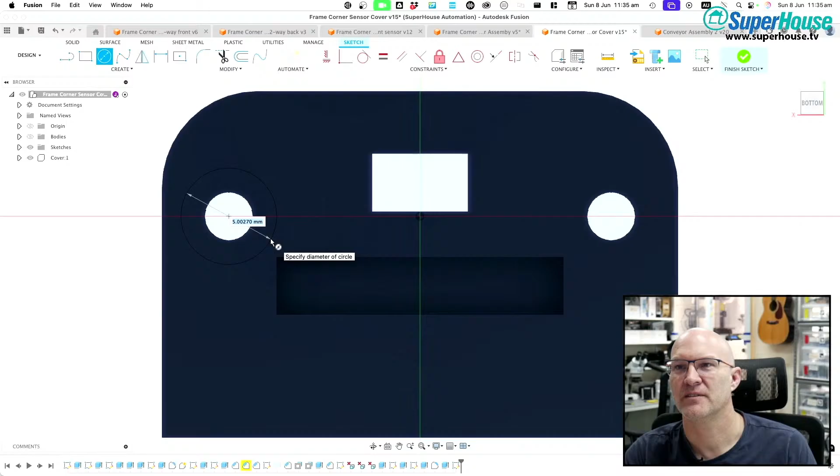Let's put a sketch on here and change view to orthographic. I'm gonna put a circle on here. What size shall we make them? 4mm pegs.

Cable tie said, I like the screws, a clip-on lid feels cheap to me. Yeah, I know what you mean, cable tie.

That comment has thrown me. I'm not sure now whether I want to do this.

Finish sketch. Okay, I'm going to... yeah, you're not actually going to see it.

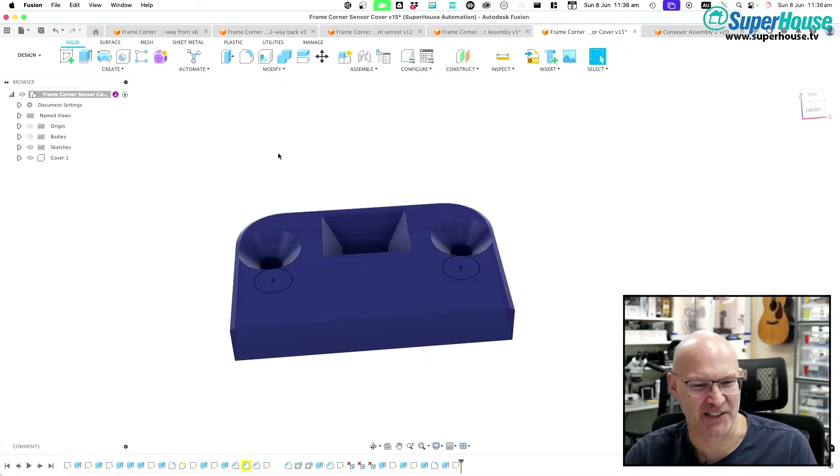I don't know, it needs to have the Lego branding on the pegs. Let's just get rid of these features. Doink, doink, doink. Yeah, I know that was not very...

I'm doing this in a kind of grungy way. I'm just treating this like clay and grabbing, like deleting features instead of fixing them in the timeline, doing nasty things like that. So,

Hang on, capture position. Yeah, okay. How far down? Oi.

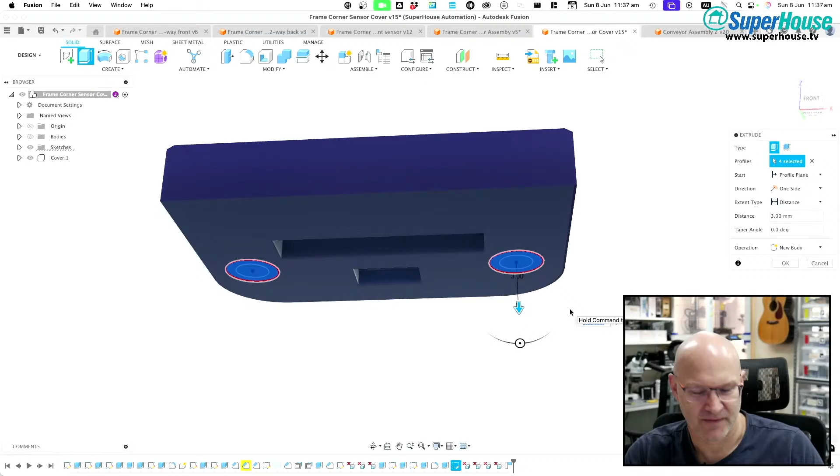Extrude. Oh, yeah, capture position. Let's go 3 millimeters, new body, join. Why is this? Oh, okay.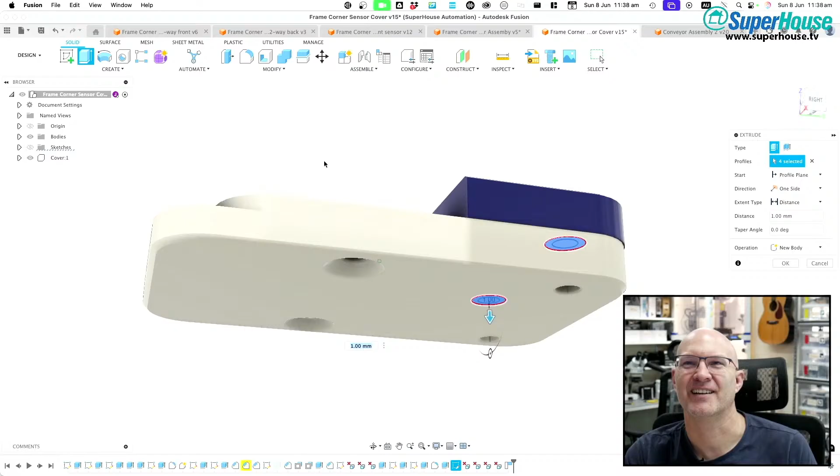Bodies. Oh. What? Oh, okay, I'm in the wrong thing. Okay, yep, all right, forget that.

I'm going to close this and not save it. It's because I've got a couple of different bodies in that.

Technically I don't, because the pegs could go through the holes in the PCB of the time of flight sensor. That's kind of what I was envisaging. But, okay, for now I'm going to not do it.

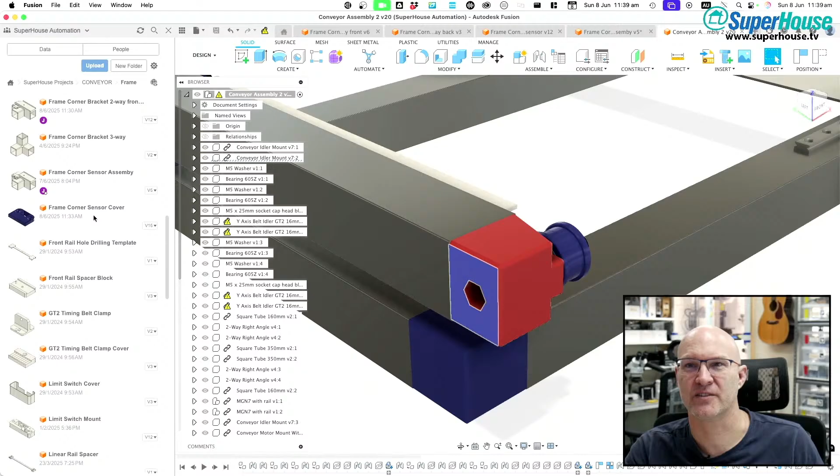I'm going to leave it as... where am I? Corner sensor cover, there we go. So back into this without the change. So now, where's the assembly? The assembly, it is up to date.

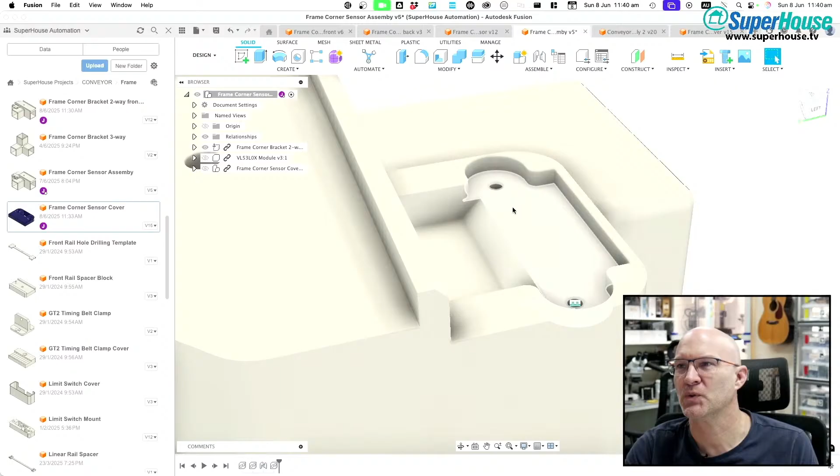You still need them, dovetail slide on. Stick with the screws. I'm going to follow cable ties feeling on this and stick with the screws. Two screws go down from the cover, through the cover, then through the holes in the PCB, and bite into the body. So they squeeze everything together, hold the top cover down, hold the time of flight sensor in place, and everything is happy. I'm going to stick with that. Cable tie said, wise counsel, I call it.

Yep, so this is, oops, wrong thing. So this is where we are ending up.

I like it. I just wish I had a faster printer. Maybe an X1C, I actually have one in my shopping cart.

Bambu. My notifications are going a bit nuts. Oh, that's a WhatsApp chat about organising a scuba diving trip.

So my shopping cart right now is this. I'm not actually going to check out. Some PLA, some reels, and a combo X1C with the AMS and the hub. But this is what Scott Miller said, could use a CNC mill to make it from aluminium. I could, if I wanted it to be $1 million.

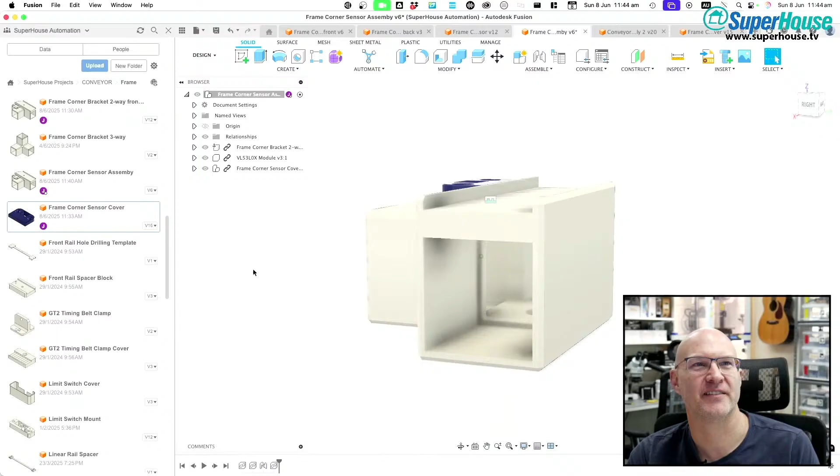So, yeah, well, this has been an extended tour through the strange shapes of my brain and what I was doing yesterday. It started off with designing the corner piece, then extending the corner piece to add the support, then thinking I need to integrate the sensor, and it all just grew from there. So I just kept adding and extending and making it more complicated.

Now there were some messages. Scott Miller said, for a break from the complexity, take a look at the pics I DM'd. Yes, I was just going to say. He said Britney Spears' dad gets it and doles it out to him only when he sees fit. Yeah, that's right, there is a conservatorship looking after me. Take a look at the pic.

So Scott DM'd me some stuff. Where is Discord? Hang on, I'm going to switch to this view. Stereo. And get rid of, there's some weirdness in the scripts that handle the view changes, there's Discord? No, Discord is starting. Yeah, that handle the view changes when I switch camera views and things, and it gets confused about whether the picture-in-picture down in the corner is meant to be turned on. So I need to figure that out. That's since I switched from doing the live streams 100% from the Mac Mini with the ATEM instead of having the laptop off to the side that was also doing stuff.

So here we go, looking at Scott's messages. I'm gonna open in browser. Yes, I'm just going to pre-open a bunch of these things. Open in browser. And open.

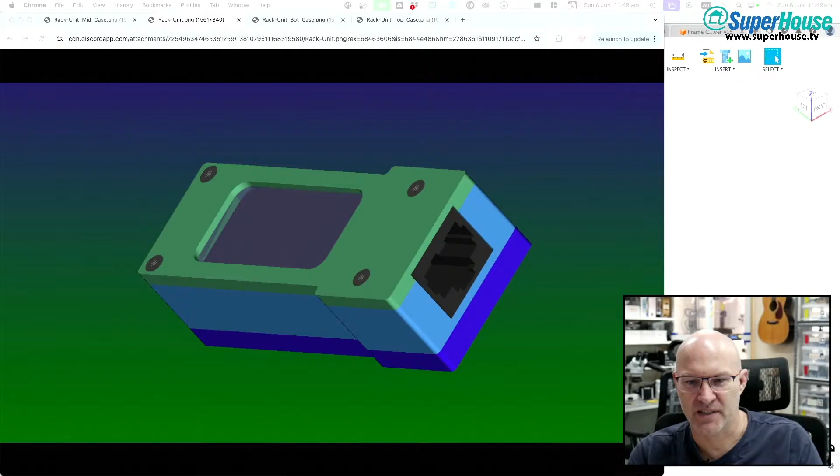Ooh, and here's another picture. I'm going to go open in browser. Ba-doom, there we go. So you've got the little devices that go at the ends of the drops there. And then you've got the device here with the screen that you plug into the patch panel, and it reports back what device it sees at the far end of that particular drop.

Nice. Yeah, so Scott, I can print some stuff and send you, just make sure things fit, do some test fits. I don't have the PCBs obviously, but I could print the plastic parts and see if they physically fit together and send you photos or whatever, post them to you.

Could be cool if it could display the LLDP info. Okay, whatever that is.

Okay, now I am gonna not have this live stream go very long because of some drama. Drama time. Okay, this is the drama.

I've got to pause and think about whether I should actually reveal this, but I don't think I'm revealing anything too personal. The thing is, if this was just related to me, I would tell you, but it's something involving my mum and a bad situation that she's in right now. I think it's okay to tell you, so I don't think she would mind.

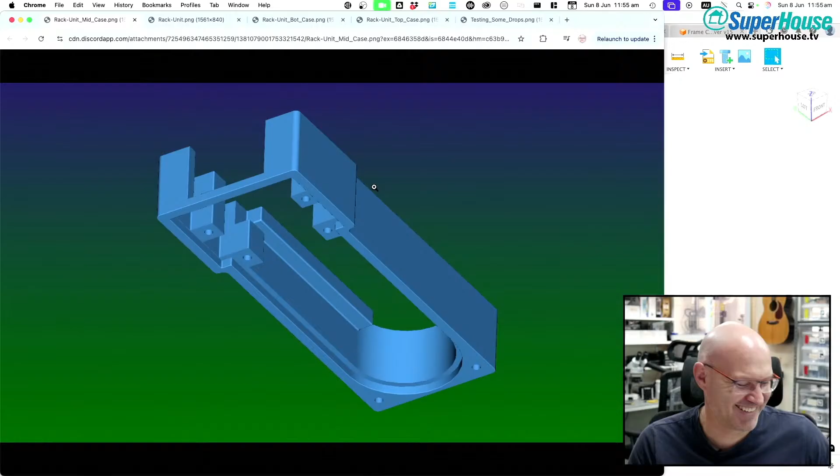Pete said that enclosure design is clever. How are you managing the internal wiring? A tiny spaghetti monster. Pete, your comments today are so funny.

Now what I need to do is, if I take the cover off, solder the IDC cable onto the time of flight sensor. One thing that would be cool is if I mounted a socket in here, so the time of flight sensor could have pins on it and just be plugged in, and then removed. That would be really nice. But I'm not sure if I've got the clearance, because I've got to allow for this space here. The time of flight sensor overlaps the extrusion that runs in through this point. I don't have that much thickness to deal with.

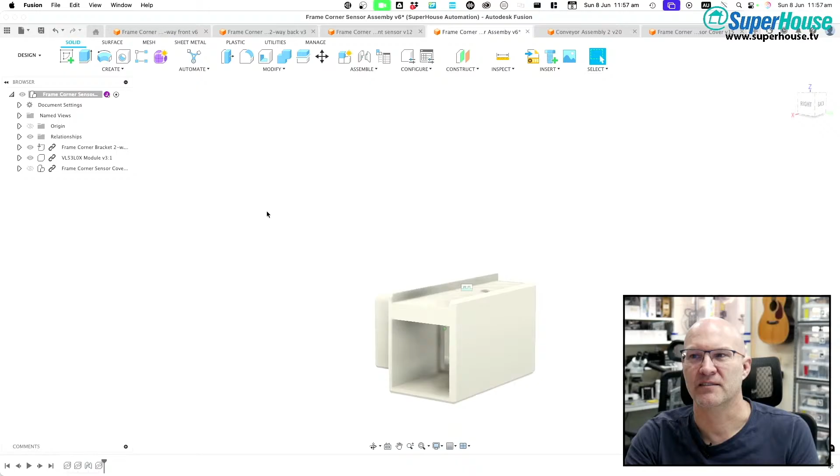So although if I moved it 2 more millimeters, no, it still wouldn't be enough. So my plan is: IDC cable, solder it onto this end of the time of flight sensor, then feed the IDC cable down through the slot, and it would hit that face and be deflected sideways. Then screw all of this together, put the cover on, screw it closed. I would end up with a tail of the IDC cable hanging out here, and then the extrusion could be pushed on over the cable with the cable coming out a hole in the extrusion. Then crimp the IDC connector on the other end.

So once that's been done, it will no longer be possible to remove it. Basically everything will be captured by the cable, and I don't really see a way around that. It's going to be captured at this end by the sensor, and at the other end by the IDC plug. What you might have noticed here is that the holes on this don't quite line up - the hole here is matched, the hole at this end is not matched. That's actually an error in the model for the time of flight sensor.

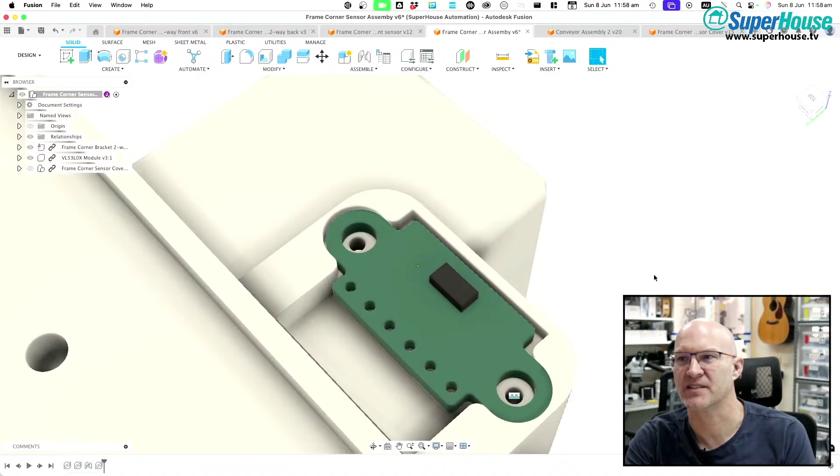It's not quite accurate. If I put the cover on, you can see the sensor thing doesn't quite align with the aperture, but in reality it fits. So just in case anybody was looking at that and thinking I screwed up - that placeholder model is just not quite an accurate representation, it's just close enough.

I don't see a neat way around that. Cabling this is a bit of a pain because of all the cable that has to run through the inside of the frame, including to the back sensor - where's the conveyor assembly? We've got cables that run all the way down through the side channel and come out there. There's actually a drag chain that goes along the side, and then cables that go up inside this back rail and run to the motor on that back rail, because we need to be able to run the back conveyor.

Ooh, Scott has just sent me another message - hang on, I'm going to open that in browser. Yep.

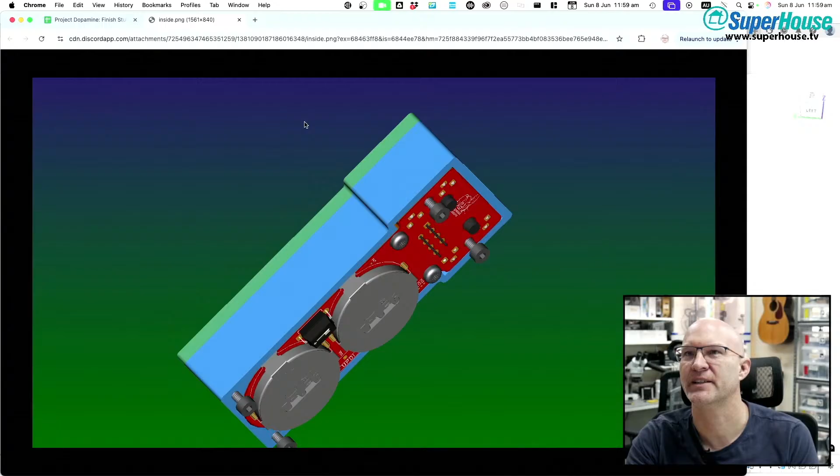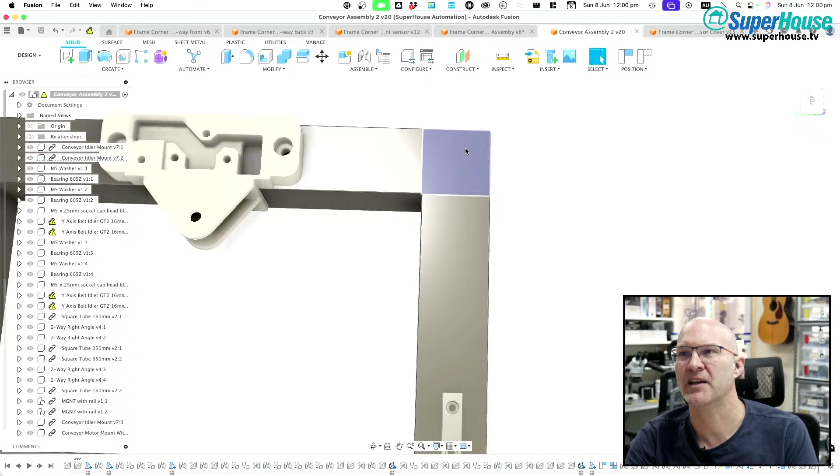Managing the cabling on this is kind of annoying. A lot of it is pre-cutting cable, feeding it through while the chassis is sitting there, not in its final position - with the extrusion sitting in their correct relative positions on the bench, but not all fully closed up yet, so I can push cables through. I need to push a cable from a hole - you can't see it here on the render - where the cable comes out, goes inside there, down here, around that corner, all the way down here, around that corner, and then up through another hole. To get that cable through, you've got to do it a bit at a time and feed it all the way through before the frame is fully pushed together. So you end up with cable running through loose bits of extrusion and corner couplings and things.

Cool. So I'm very happy with that little change to this - that's a cool thing. I need to print one for the other side, and also print one with this updated design, and print the cover that goes onto it. I also need to update this corner bracket and add the screw hole onto it.

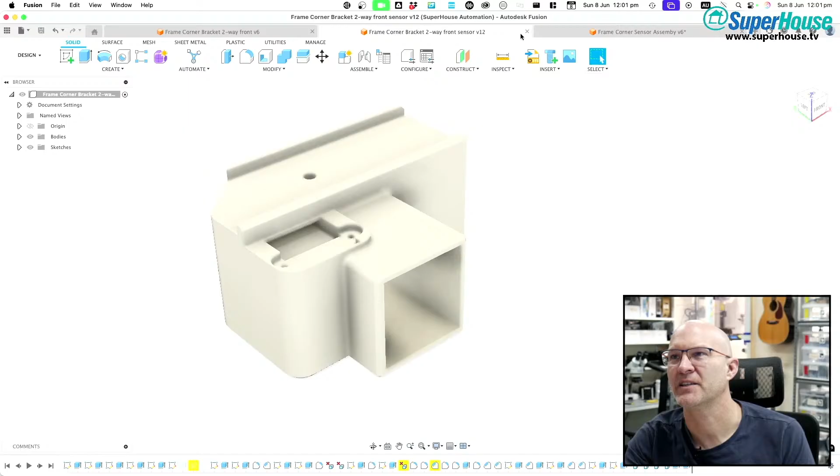So there are some changes to do. In fact, I'll take my laptop with me and make those changes while I'm relaxing at Mum's place, spending the afternoon. Pete said, "Go home, John."